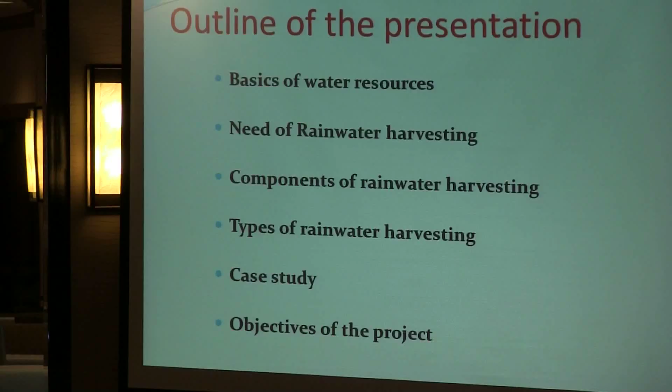And because of the need, we have taken a case study in our university campus. I work in the Jawaharlal Nehru Technological University, Hyderabad. We'll see what the objectives are, why we have taken that study. Then we'll see what is the scope of artificial recharge. We know natural recharge was happening in earlier days, and now we are going for artificial recharge. What artificial recharge is and why we have taken that study we will discuss.

What are the baseline details in our campus before starting this artificial recharge. Because it is on rooftop rainwater harvesting, what is the total built-up area available, along with the land use, land cover details using geomatic technologies. Then what are the proposed structures in the campus. We also use advanced technology in remote sensing and GIS to speed up the work, even if it is a larger area.

Then, after construction of all these structures and harvesting the rainwater, after filtration and recharging into the underground artificially, either into the deeper aquifers or shallow aquifers, confined or unconfined aquifers, what is the impact of the artificial recharge of rainwater into the underground with respect to quality and quantity. That's what I am going to present.

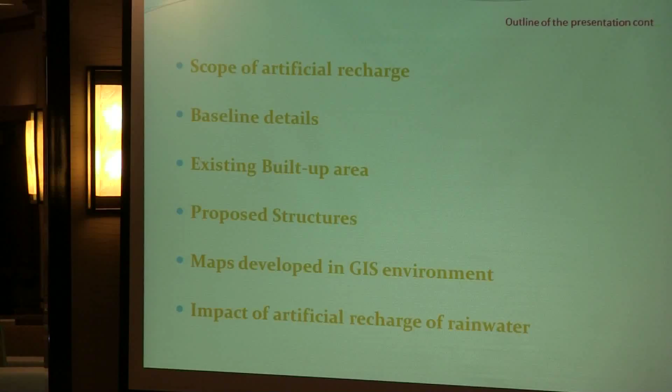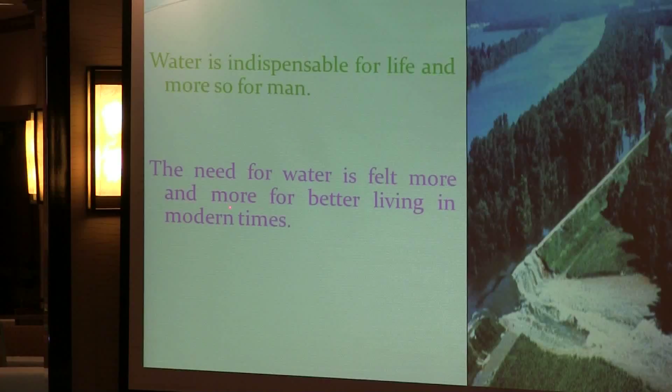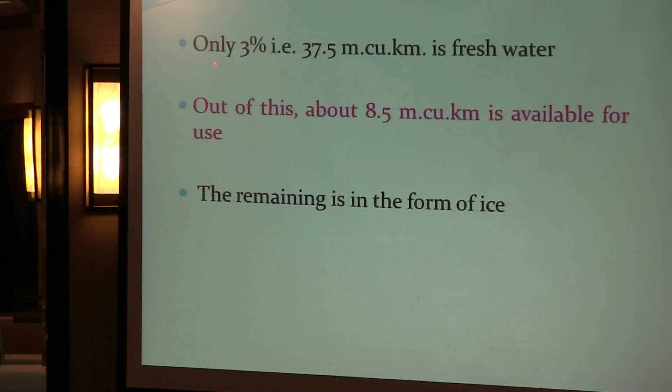All of us know water is the driver of life. It is indispensable for life, and more so for man. The need for water is felt more and more for better living in modern times and modern cities. These are the statistics of the world's water: 97% is in the ocean, so 3% is available, and again most of that is in the form of ice. The demand is increasing day by day, so most countries are going to face water scarcity by maybe 2050.

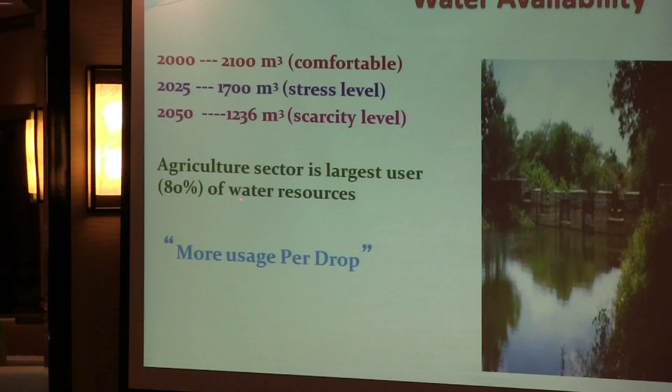The agriculture sector is the largest user of water resources. Of the available water, 80% is used for agriculture purposes. Only 12% of the rainwater is being used in our country; the rest flows into the sea. So this is the need for rainwater harvesting in the campus. And only 10% of the surface water and 90% of the groundwater are being used for drinking purposes.

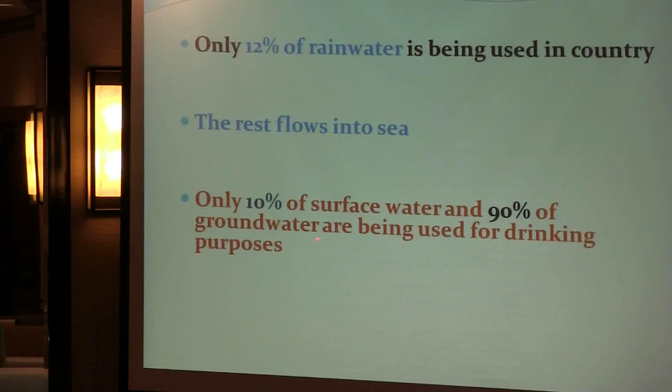Then what is the solution for this? Instead of all the water going waste into the sea, rainwater harvesting is the solution. It is freely available, it is the purest form in nature, and it is the basic source for all other forms of water. Take any form of water, atmospheric water, soil water, underground water, lake water, sea water, stored water, the basic source is rainwater.

If it is available freely on the top of the building, in the campus, we can harvest it, filter it properly, then use it for our purposes, or recharge it if there is any excess beyond the use. First we have to harvest it, then filter it properly if any sediments are there, then store it, because the rainy days may be 40-50 days in a year. So we have to store it and use it for the remaining 300 days.

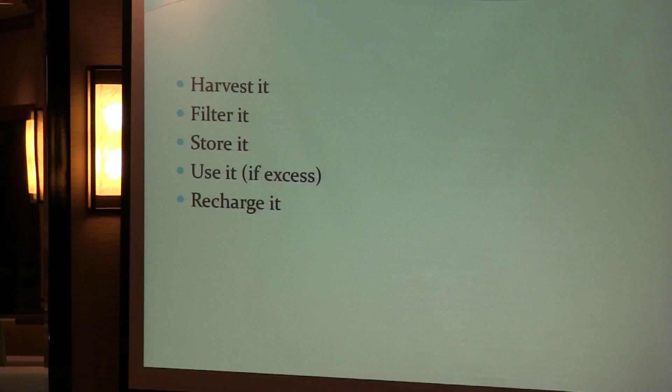Then you can use all the stored water after filtration, after proper storing without any generation of algae and other parameters. If there is any excess, then recharge it into the underground. You can recharge into confined aquifers or unconfined aquifers.

Why is rainwater harvesting the best option? Rainwater harvesting systems have been practically used since the prehistoric period. This is a simple and economically viable technology. It is very simple, and economically it is not costly, and it suits all over the world, especially Indian climatic conditions. And we need to keep in mind that rainfall days are maximum 40 to 50 days.

So we have to plan in such a way that we store that water and use it for 365 days in a year. Rainwater falling over the terrace or roof can be collected and stored; otherwise it goes into the sea through rivers.

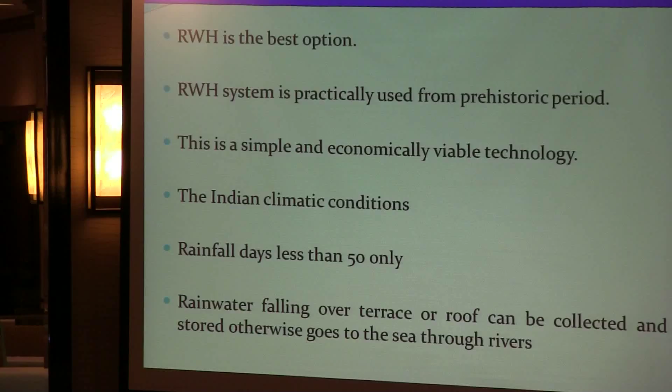Rainwater is the purest form of water. This is the one thing we need to remember. Other forms of water we have to clean and filter, but rainwater is the purest form, and we have to do minimum filtration. It is the primary source of water, and other sources depend on rainfall.

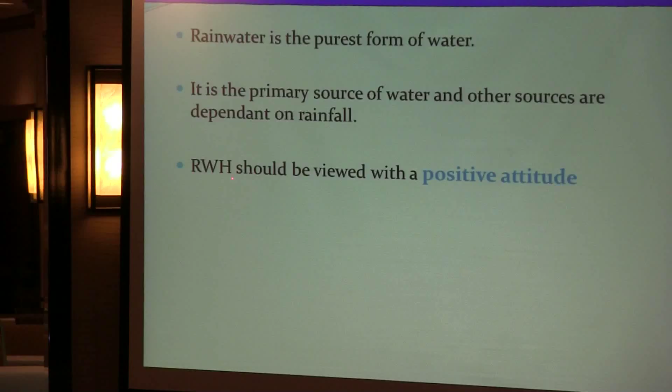Rainwater harvesting should be viewed with a positive attitude, then only we can harvest it and use it. All these are the benefits. We harness the good quality water resource which was being wasted. A lot of scope is there for rainwater harvesting to augment the expensive piped water supply.

Whenever there is water supply given by municipalities or corporations, if you depend on rainwater and not on piped supply, the piped supply system cost may reduce. To save expenditure on water, instead of purchasing packaged water, you can store the rainwater which is available freely in front of you.

To prevent soil erosion and urban flooding - most urban areas now are converting from pervious layer to impervious layer, which is leading to more urban flooding and more soil erosion.

It is inexpensive and very simple technology. It aids ecological conservation also, which is more of a concern now.

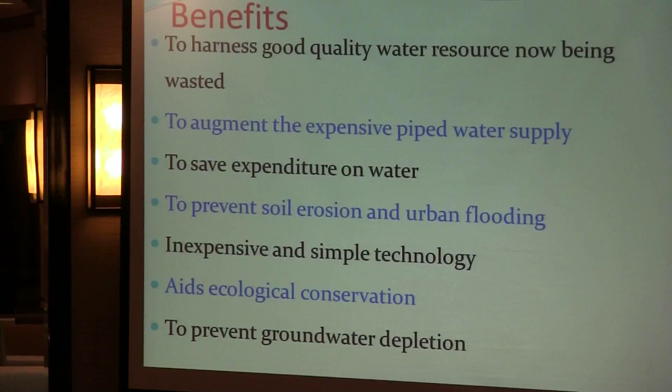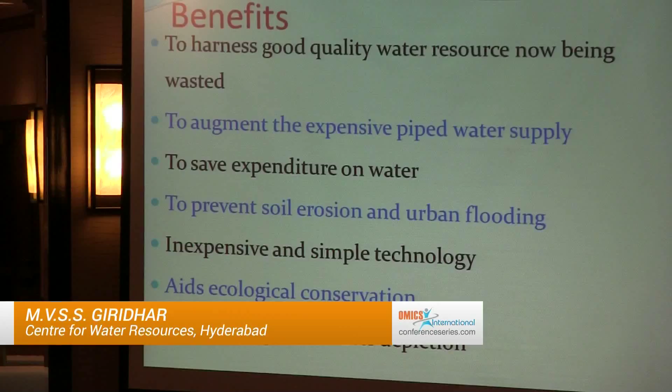To prevent groundwater depletion, if you store the rainwater and use it for your purposes, you no need to depend entirely on groundwater for all 365 days. At least on rainy days you can store it, and if water is available, you can extend it further so that you can prevent groundwater depletion.

There are many advantages. I've given a small list here.

There are two types of classification. One is land-based, meaning water falling other than on roofs. When it falls other than on roofs, it consists of more sediment and requires more filtration.

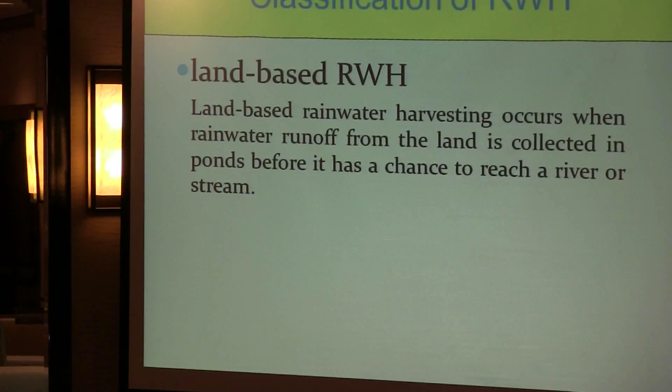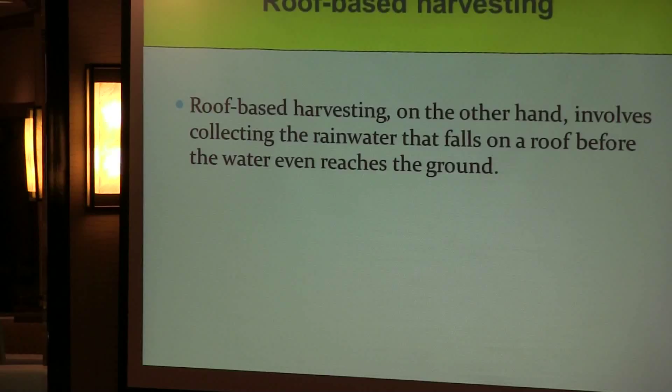If the water is rooftop-based, it is more or less clean, and if you maintain the rooftop very clean, the water coming from it is nearly 90% clean. These are the various methods of rainwater harvesting.

I am not going in detail, but these are the components of it. Maintain the catchment area clean before the rainy season so that you get pure quality water. There is also a conveyance system - depending on your catchment, you need to design the conveyance system.

No need to operate the valves. You can set it with respect to time or with respect to quantity. Automatically the first rain separator separates from the main flow, then it goes into the filter unit.

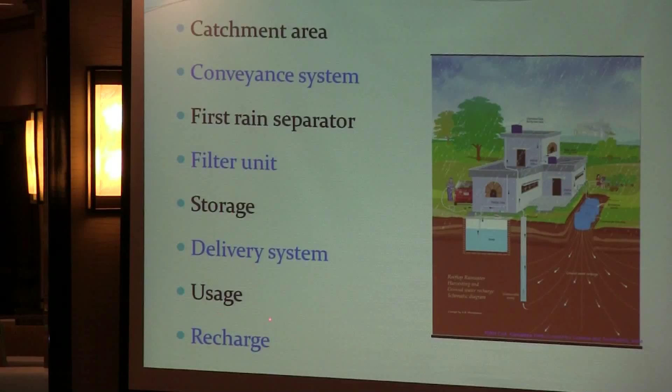After the filter unit, it is stored, then goes to a delivery system, then usage or recharge. So you have to give a provision to use it, and if it is in excess, you need a provision to recharge it into the underground aquifers.

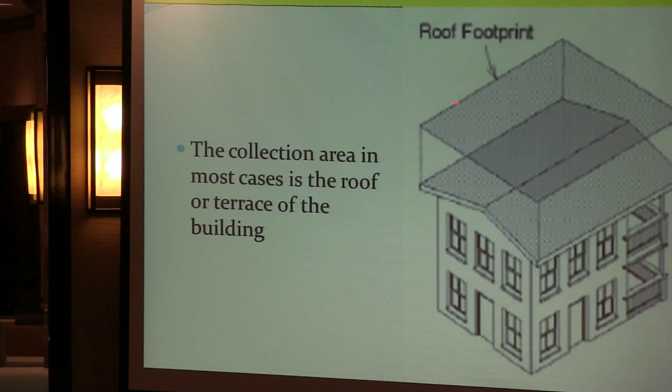So these are the components, and this is the collection area - whether it is a rooftop, flat top, or sloped one, you can use it. If it is of different types or different orientations, we can still use it.

With all this basic analysis, we understand the need for rainwater harvesting, and we have taken a case study in our university. As I explained already, I am working in Jawaharlal Nehru Technological University located in Hyderabad, India.

We have taken a study to harvest the rainwater, use it for our purposes, and if it is in excess, recharge it into the underground. This is the objective of the work we have taken, and I am going to present it.

We studied the traditional rainwater harvesting structures available in the literature. We found there are a lot of maintenance issues. So in our research, we reduced the maintenance cost, and it is nearer to zero.

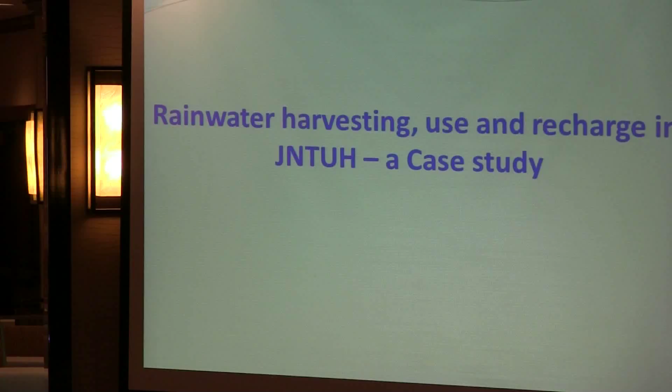Instead of sand on the top layer, we have gone for advanced filtration - a geotextile membrane with a 120 micron size. All particles greater than 120 microns settle on top of the membrane, and it is very easy to clean. So this is all the research we have done. Then these are the objectives.

In any campus, you can take it as a large rooftop area available. When the collection area is more, your quantity of water coming is more, and you can store more water. The campus is located in Hyderabad, and it is more useful for demonstrative purposes.

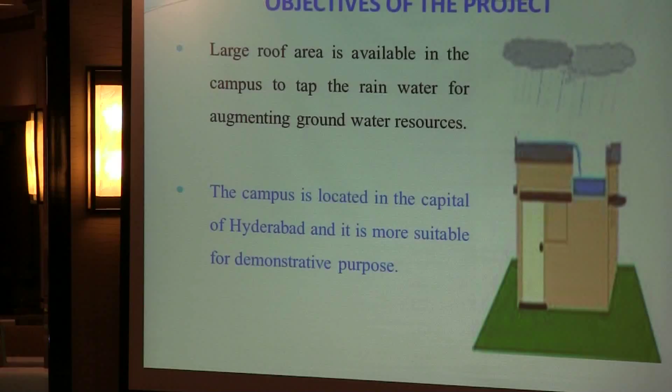Because the funding we received from the Central Groundwater Board, Ministry of Water Resources, India, they said it needs to be for demonstrative purposes. So we took Hyderabad, which is the central capital of the state, located in the center of the city. We run MTech, MSc and PhD courses, and it is useful for our students as a live demonstration as they are learning the theory.

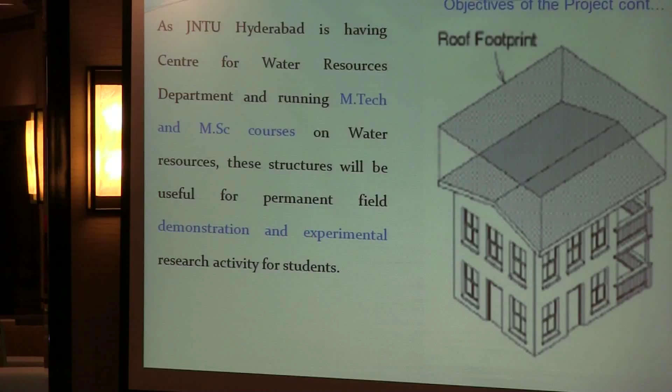They can do lots of field experiments and field demonstration experiments for their research activity, and also conduct regular training programs to the public, nearby colonies and villages, and village presidents, to disseminate information about the significance of artificial recharge activities.

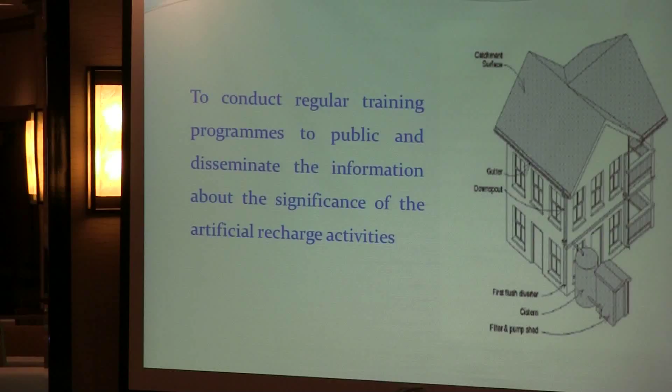It is a part of the project. We are trying to disseminate information to all the local people, to harvest, store and reuse water for drinking, domestic purposes, and gardening purposes in the campus.

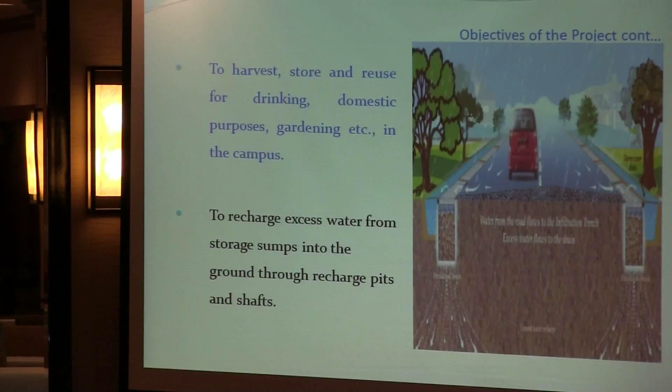To recharge excess water from the storage sumps into the ground through the recharge pits and shafts, we are not going directly for recharge pits but for a concept of reverse tube wells. Water after filtration in the recharge pits is directly injected into the underground aquifers without taking much time, so that we can avoid space limitations.

To encourage farm rainwater harvesting, so as to harvest the rainfall falling other than on the rooftop area within the campus.

When you use this type of technology, the cost of the structure is less and you get more rainfall collected, but it consists of a little sediment. We need to filter it, and only then can we recharge it.

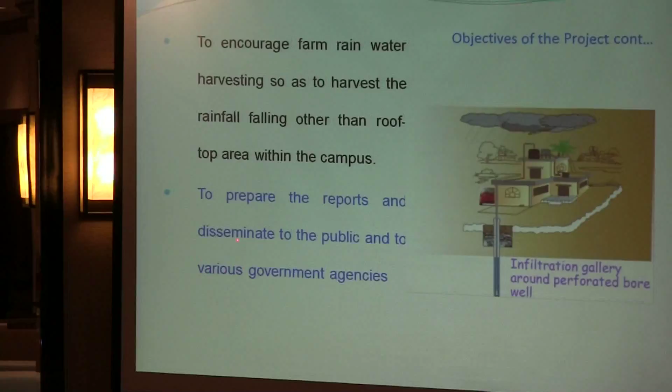To prepare reports and disseminate them to the public and to various government agencies about the new and innovative activities we have done in our university.

To monitor and record the groundwater level fluctuations in the observation wells on a daily basis using automatic water level recorders. We need to study and find out the impact of the artificial recharge, focusing on both quality and quantity.

We observed daily water levels in the bore wells within the impact area and outside the impact area, so that we could find out how much the water level rose because of this rainwater harvesting.

To recharge groundwater through recharge pits along with recharge shafts, thereby increasing the groundwater levels. We found almost a 10-meter rise in the groundwater in our university because of this rainwater harvesting.

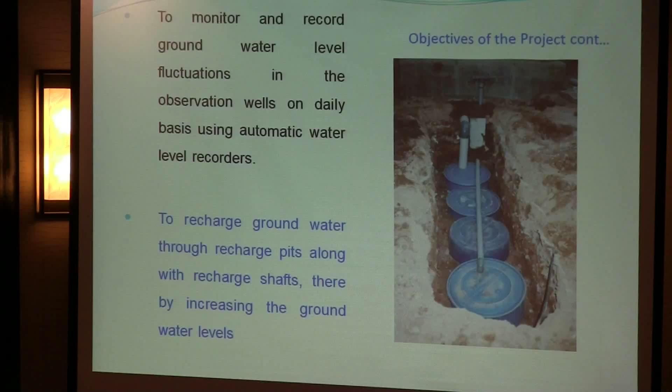We also studied quality parameters. The fluoride level was reduced from 1.5 to 1 ppm, and still a lot of scope is there to improve it further.

So this is the built-up area. This is all done with remote sensing data and land use land cover analysis. Within one hour, you can prepare all this land use land cover information.

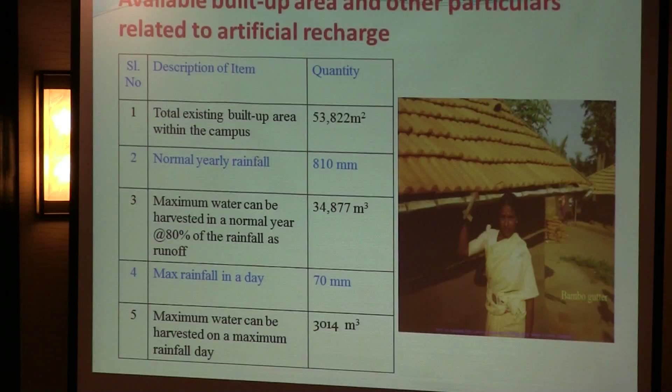So this is the study area we have taken for this work. The total built-up area is available for the scope of this work. Approximately 11,339 square meters of building we have taken for collection of the rainwater. And this is the design parameters.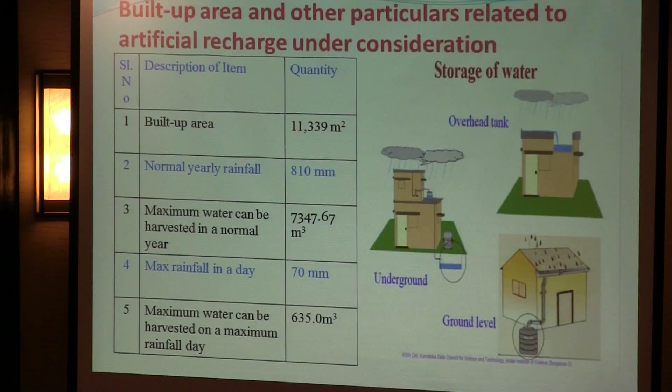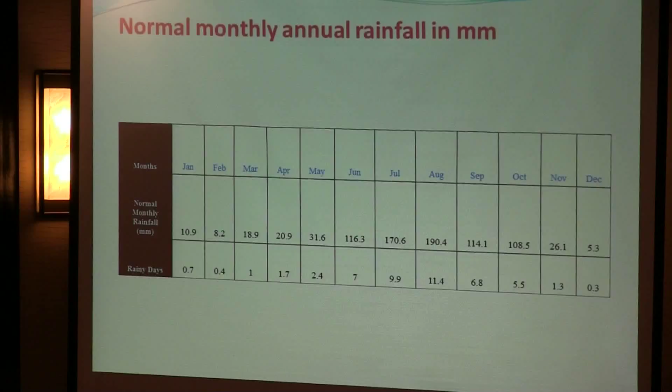This is the total land use land cover in the study area. We need to study the rainfall so that we can prepare the water balance, how much is available on a monthly basis, so that we can find out the demand, the use, and the surplus, and prepare the water balance.

This is how the rainfall is available in Hyderabad. We also need to study how the drought situation is occurring in that particular campus, a particular study area.

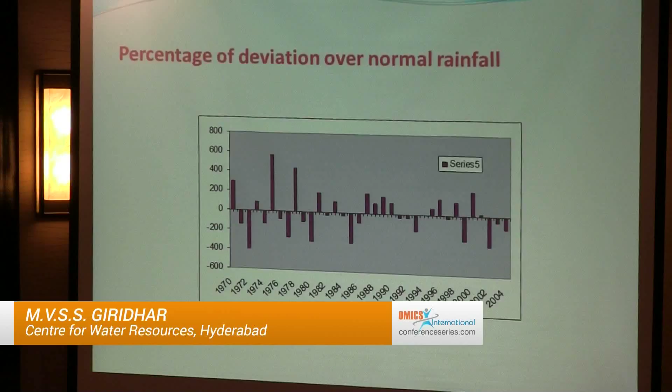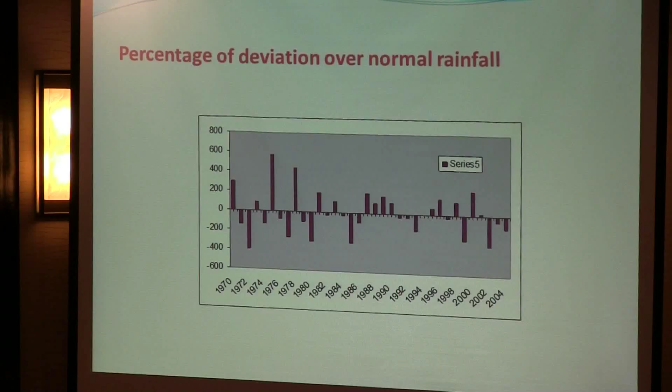This is the normal line, and above it we say it is positive rainfall, and below is negative rainfall, relative to the normal rainfall over a period of 35 years. This is the trend line of the rainfall, and it shows a decline in rainfall.

As the quantity of water coming is less, we should be more careful and need to go for more conservation methods to harvest the rain.

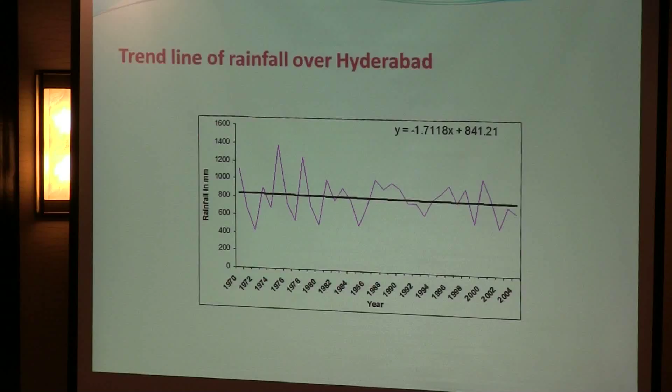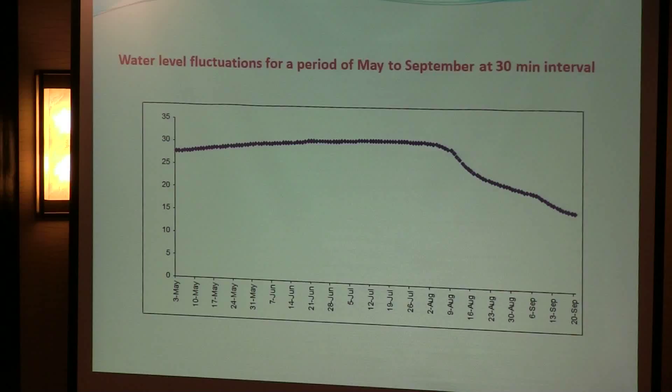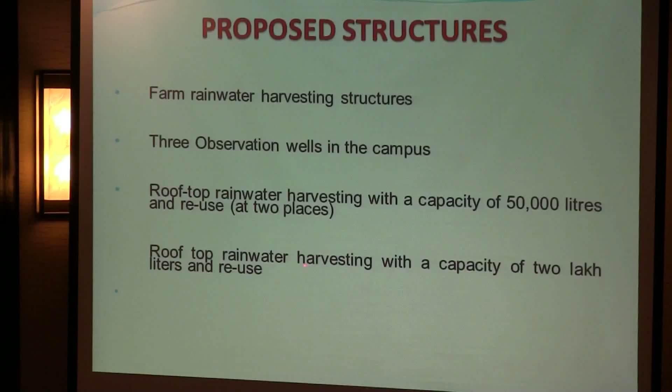We proposed rainwater harvesting to take care of water falling other than on the rooftop, and we have gone for 3 observation wells based on the Thiessen polygon method. We have rooftop collection tanks at 2 places of 50,000 liters, rooftop harvesting with 2 lakh liters for reuse purpose, and also 1 lakh liter structures at 3 places. This is the methodology adopted for construction of the structures.

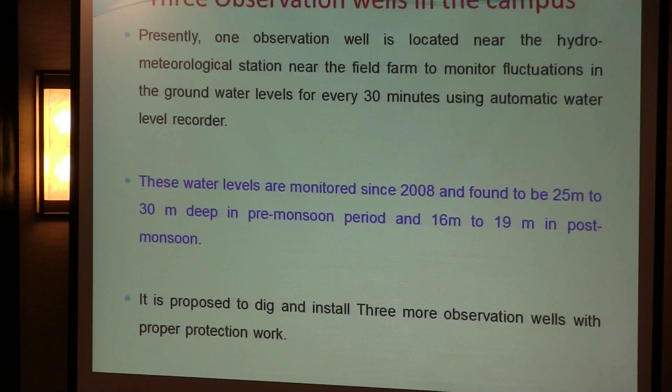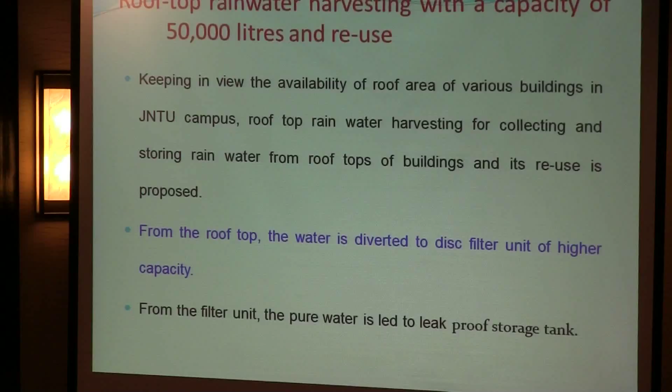This is the observation wells. We have gone up to 3 bore wells constructed, 100 feet deep, and this is the 50,000 liter structure for reuse purpose. We collect it, filter it, then reuse it, and we need to give provision that if any rainfall comes in excess of the design, we recharge it.

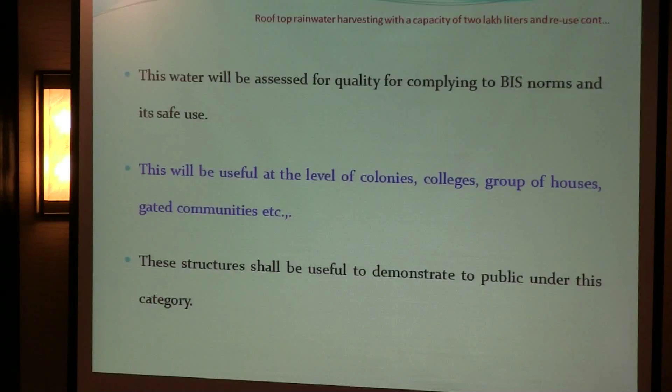This is the detailed procedure even for 2 lakh liters, and we are monitoring with respect to Indian standards. This is the 1 lakh liter structure along with the recharge shaft, supported with side brick walls. The recharge shaft is 200mm for injecting directly into the underground after filtration of the water collected from rainfall.

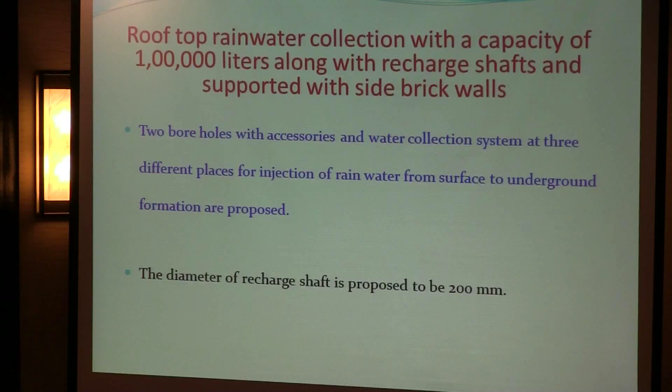You can also do this with abandoned bore wells. This is the filtration system we have traditionally used.

We have used GIS for the university, and we found this existing piezometer. We have gone for another 3 piezometers to study, and outside also we are collecting data to find the difference between recharge in the campus because of rainwater injection and outside the campus.

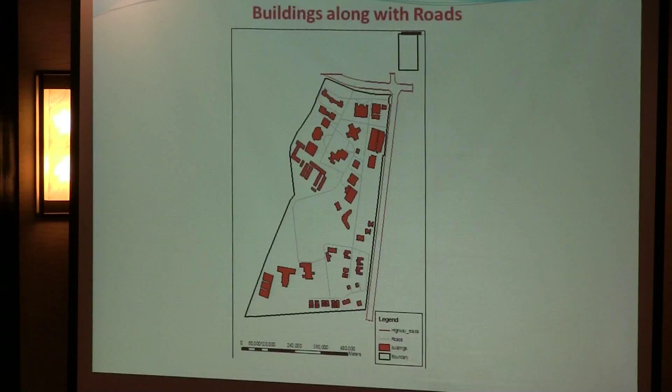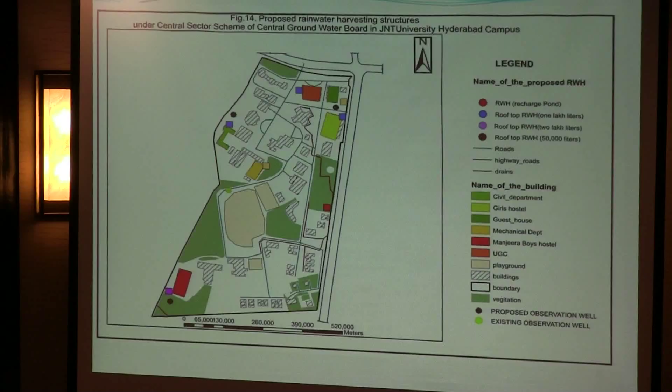These are the piezometer locations. These are the proposed and constructed rainwater harvesting structures. This is our campus with all the land use and land cover details.

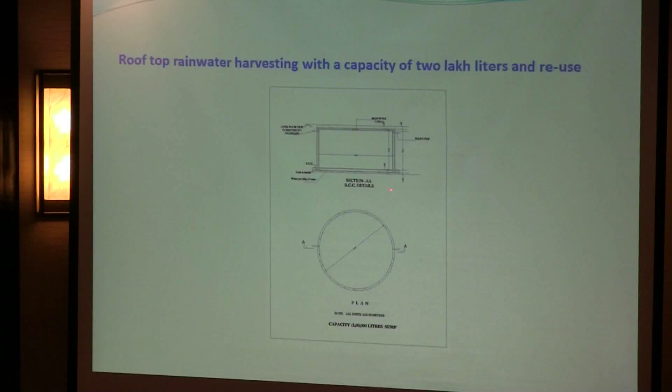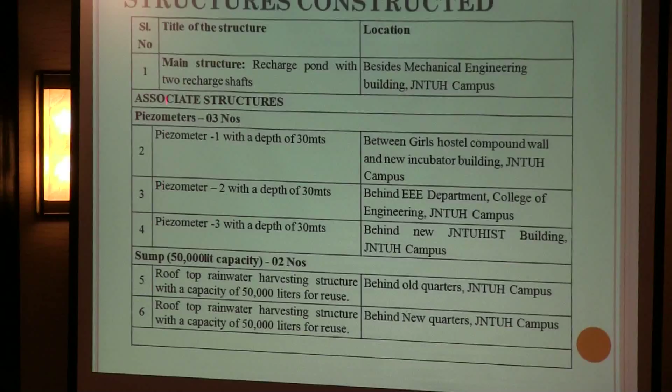After construction, we have been monitoring for the last 2 years. These are the main structures with all the locations. Total 10 structures were constructed, and we are monitoring them.

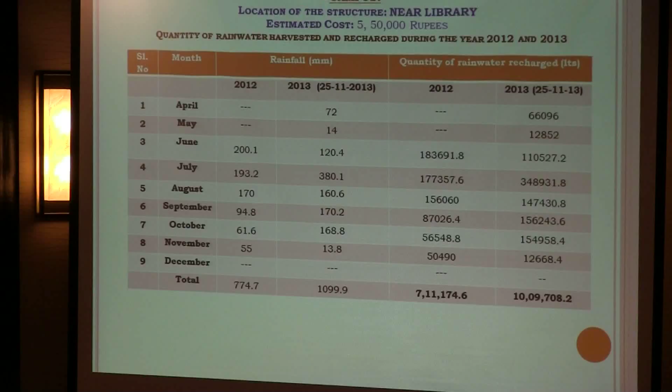Taking one structure located near the library, this is the rainfall in 2012 and 2013, and this is the quantity of rainfall we harvested: 7 lakh liters in 2012 and 10 lakh liters in 2013, in one building only, located near the library.

Similarly, in another place, we harvested almost 8 lakh liters and 12.65 lakh liters. The cost of the structure was 5.5 lakhs, and the total quantity received was roughly 22 lakh liters.

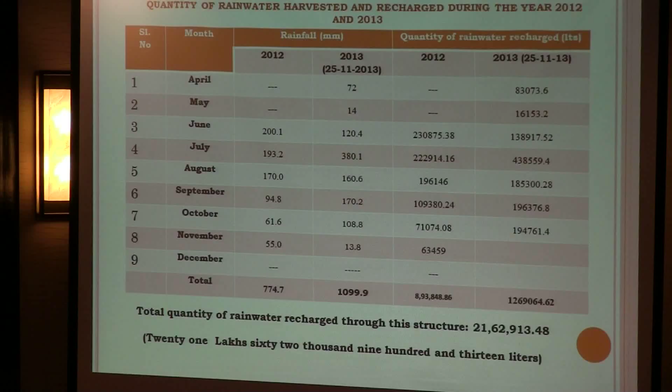At another place, same cost of 5.5 lakhs, we received almost 11.5 lakh liters. That all depends on the catchment area or rooftop area.

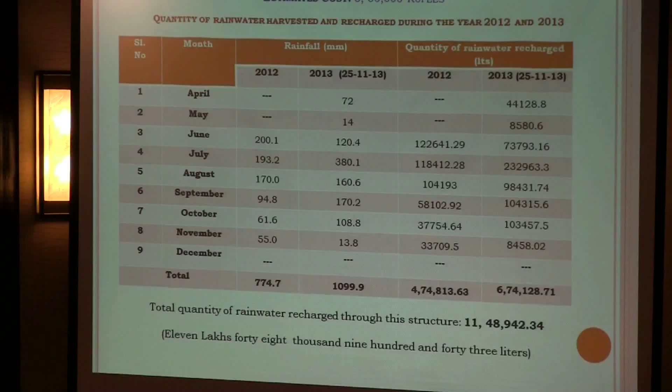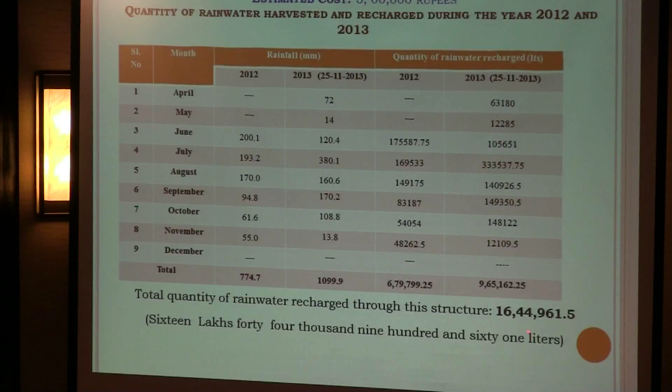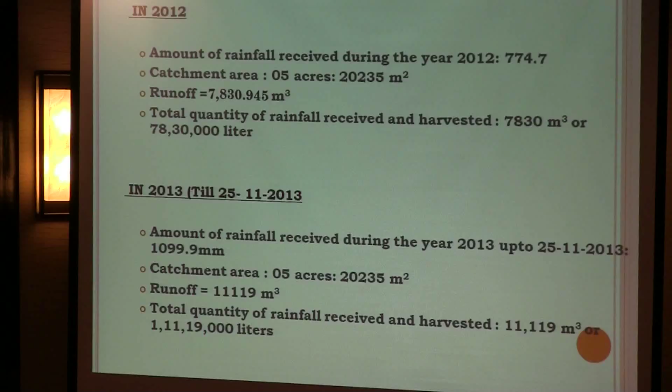After construction of more structures in 2013, we harvested almost 1.1 crore liters, and we are planning phase 2 and phase 3, where we can finally store almost 5 crore liters of water for use and recharge purposes. This is the reuse purpose.

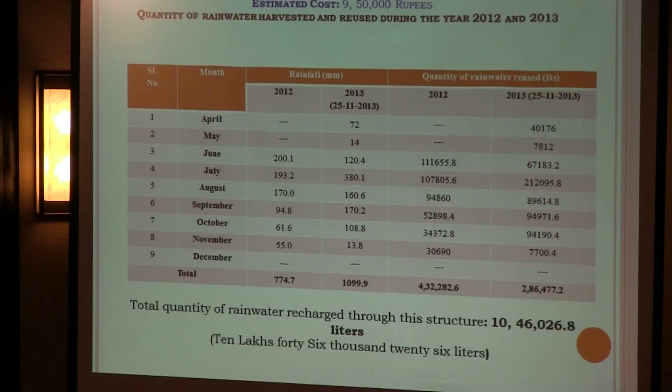Almost 4.5 lakh liters are used for reuse in a year. This is the structural details and quantity of rainfall water stored.

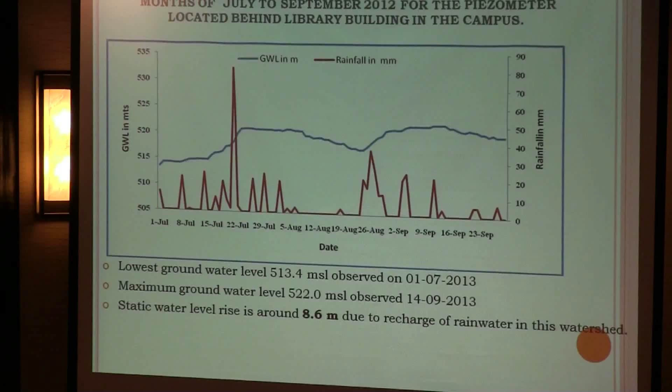This is the groundwater level fluctuation. We monitor using automatic piezometers on a daily basis at different places in the recharge shafts as well as the observation wells. This is another place.

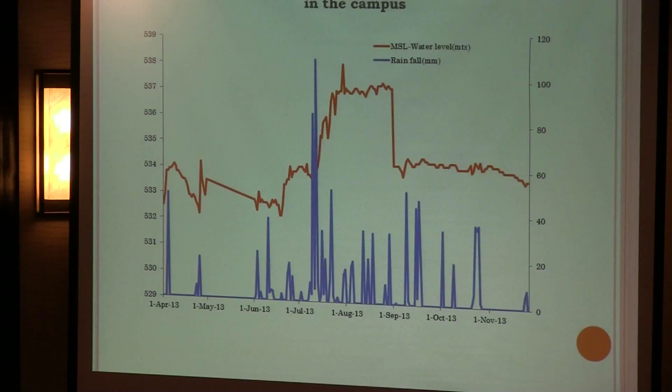This is the place near the girls hostel, showing how as rain occurs, it recharges immediately because we are injecting directly and artificially, not naturally. So the water level increases immediately in the groundwater. If the static water level is at this level, after injection a rainfall mound forms and it slowly disseminates, depending on how much water is taken using other bore wells.

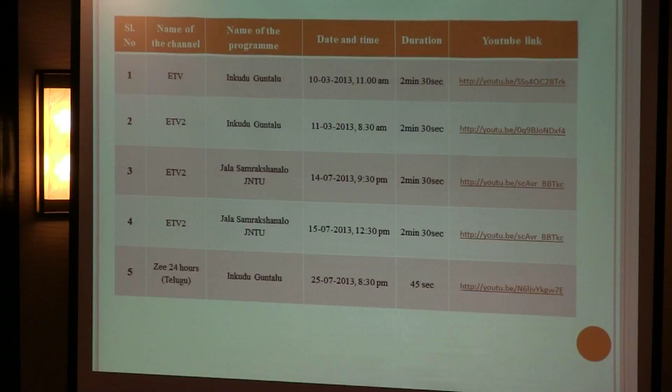We are also monitoring this because the project is meant for demonstration purposes. So many channels have visited, and it has been published and telecast on TV channels and in many newspapers.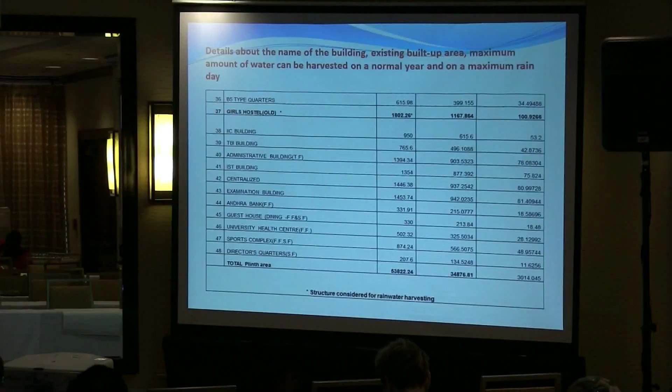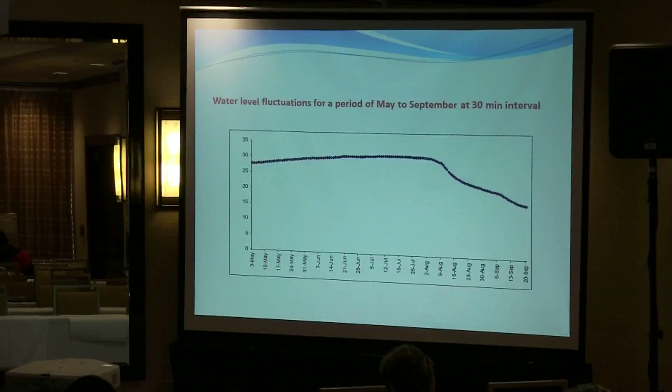Other questions? Do you consider the quality of the roofing materials in rainfall harvesting? Because the quality of the roofing materials may also have a negative impact on the quality of water. With respect to the roof system, if the roof is clean, there is no need to go for more filtration. If the roof is not clean, then you need to go for more filtration. Maybe you need to pass it through a sand filter, or you can go for a disc filter.

If you keep the roof clean before the rainy season and you have the capacity to maintain the roof clean, then without much filtration, just after allowing settling for some time, the sediments or suspended material will settle, then you can use it for drinking purposes and all others. If your roof is not clean, then you can go for a disc filter, online filtration we say, or otherwise you can go for a sand filter.

Yeah, I'm not just talking about the cleanness of the roofing. I'm talking about the materials used for the roofing. Is it galvanized iron sheets? Is it asbestos? Those things are what I'm referring to. Are they using the same quality of material? Yes, yes. We have not done studies on different types of roof material. We have taken only RCC roof.

Even if it is a different roof material, I don't know exactly, we have not studied that, but if you keep the surfaces clean, then the quality of the rainwater is good. But we have studied only RCC roof structures. Reinforced cement concrete. We have one more question over here. Reinforced cement concrete structures.